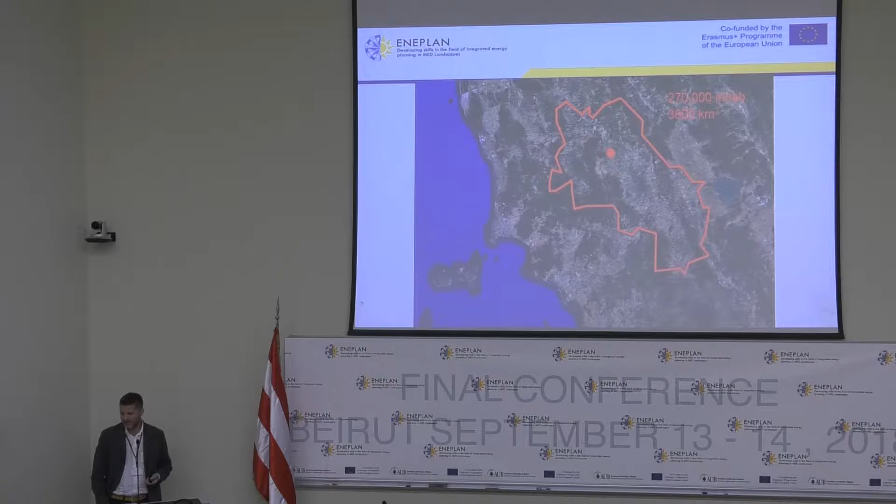The area of the province of Siena is mainly covered by agriculture and forests, so there are few cities—one of these is Siena—so it was quite easy to achieve carbon neutrality in this area. The point here is that Siena itself, the city, is not carbon neutral.

The urbanized area—especially the historic center of Siena, which is a UNESCO heritage site—we made an assessment of. You can do almost nothing within the city center, so we tried to provide a vision on how to make this historic center carbon neutral by 2050, for example, in the long run.

We first made an assessment of current emissions within the city center, based on heating and cooling systems in buildings, transportation, waste production, etc. We made a first scenario, a short-term scenario, in which we hypothesized actions to improve building envelopes and energy saving in buildings especially, and provision of electricity by photovoltaic panels.

We also hypothesized a long-term scenario with a full transition of the system to electricity fully provided by photovoltaic panels. To see if this scenario is feasible, we surveyed the available flat roofs on commercial and industrial buildings just around the city center.

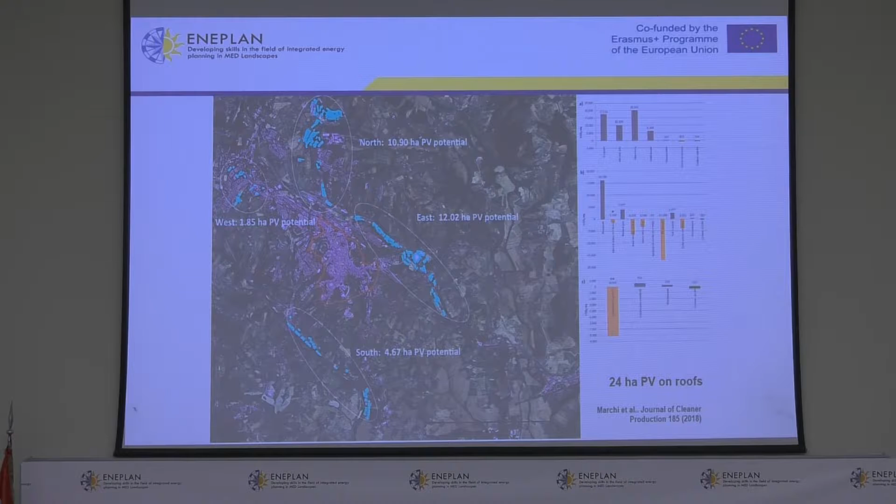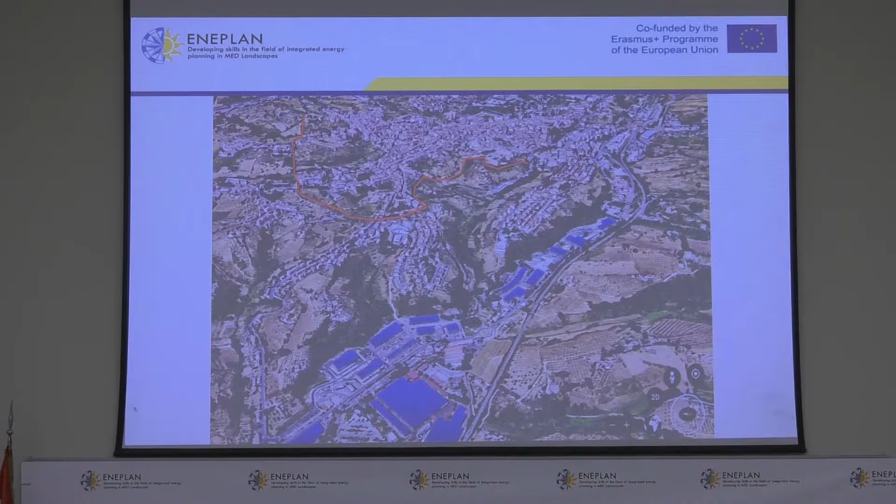This is an image of how it works: there is the historic center up the hill, and then there are the flat roofs of the commercial and industrial area here and here.

Third project: we are involved in a project named City-zen. It's an FP7 project funded by the European Union, of course, and we are part of a group of experts that travel throughout European cities to promote decarbonization through workshops or roadshows—kinds of living labs in which we work with local people, local authorities, and local stakeholders to promote actions towards decarbonization.

So the aim of the workshop is to figure out possible solutions, including renewable energy technologies and other integrated measures, to start this process, to kick off this decarbonization process of European cities.

My role in this case is to make an ex-ante evaluation of the possible effects of mitigating measures to achieve this goal of a carbon-free urban neighborhood.

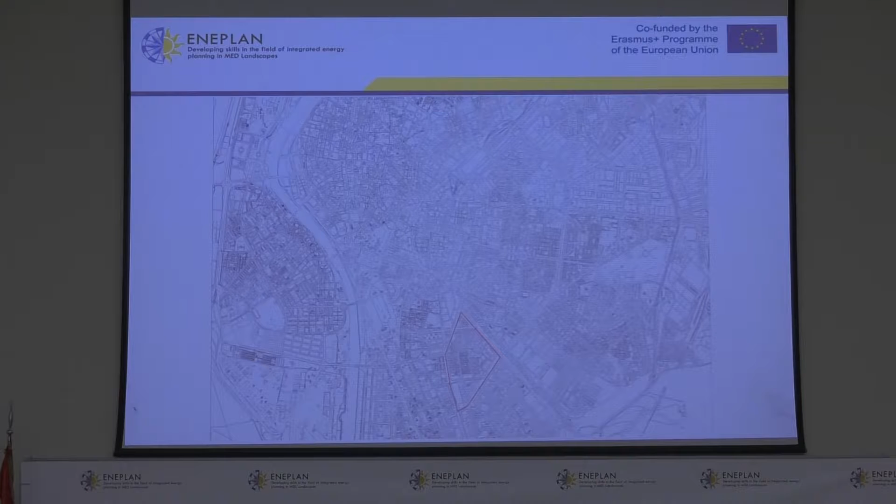We made an experiment in Sevilla, in a neighborhood called Tiro de Linea. It is a neighborhood of 14,000 people, and this is the neighborhood.

Usually the workshop takes place in one week. We arrive on Monday, we visit the place, then we have to figure out a plan, an energy plan, to design it, to assess the possible effects of this energy plan, and we make a presentation on Friday morning.

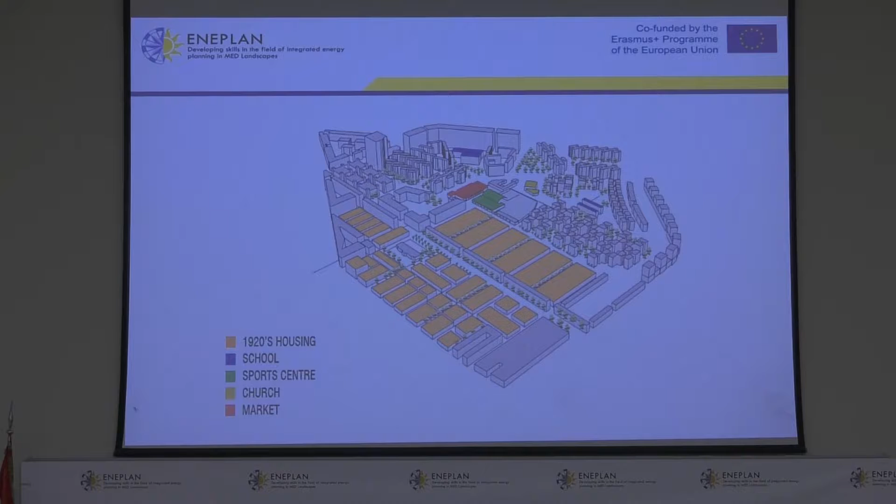Usually to make this assessment, I start from the single functional unit, that is the single household, the single family within this mostly residential neighborhood. In Sevilla, for example, the climate is Mediterranean, so it's quite similar to Italy, to Lebanon, and to our countries.

I've collected some data and information. We have seen that the electricity demand in houses is around 2 megawatt hours per year, and the heat demand is also very low in our countries, at 1.2 megawatt hours per year.

I also considered the use of private cars, waste production, and water use. Finally, I assessed the impact of one single household at 5 tons of equivalent carbon dioxide produced or emitted into the atmosphere in one year by every family.

Since I have to talk and interact with people during these workshops, what does this number mean? Well, it doesn't mean anything to everybody. It has no meaning, 5 tons. Is it low? Is it high? Is it very high? We have no idea.

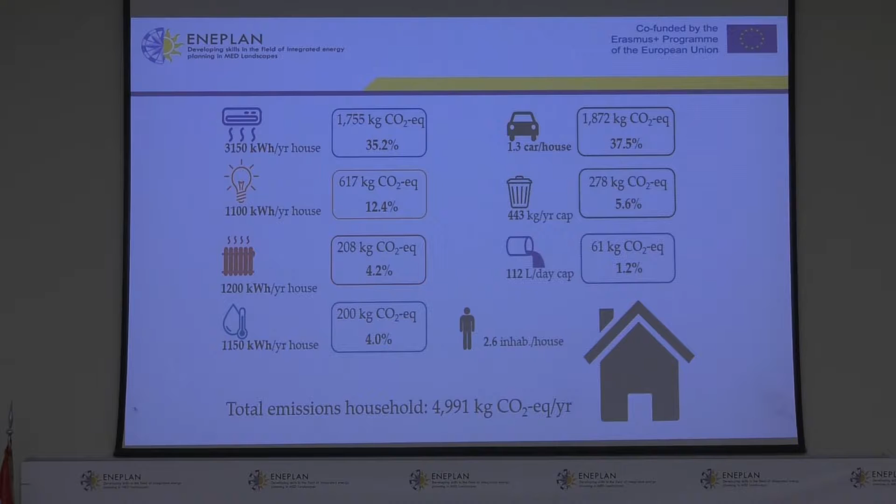But just to visualize it, we can say that in order to absorb 5 tons of carbon dioxide in one year, we would need a forest as big as a football field. So this is the forest we need per household in this neighborhood.

This is quite impressive, right? We would plan cities in which each neighborhood has a backyard covered by a forest as big as a football field. It's really impressive.

This is in general a common situation in most of Europe, so it's something that we need to manage. We made the same assessment at the level of the neighborhood.

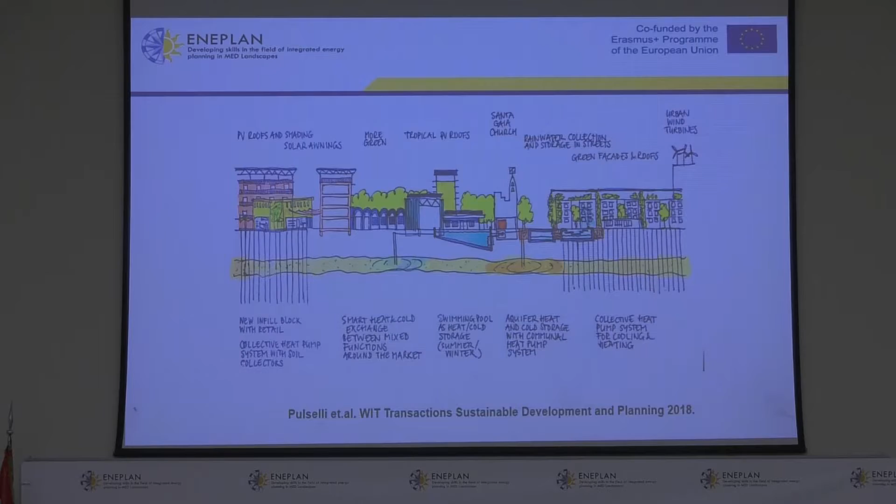With other experts from other European universities, we designed possible integrated solutions to decrease this impact and bring this carbon footprint to zero. What you see now is what is going to happen.

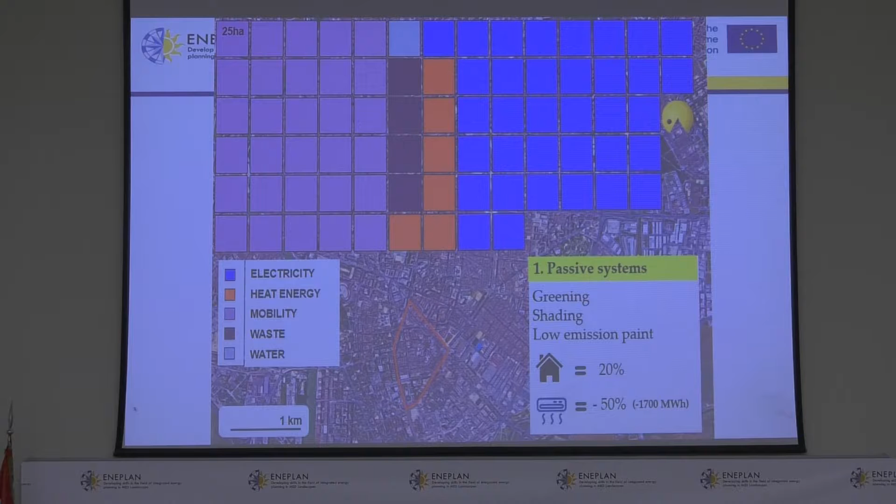Then we have thermal insulation of building envelopes, then energy saving by changing the lights, for example, or even decreasing the air conditioning, like in a place like this, where we all feel cold because it's too strong.

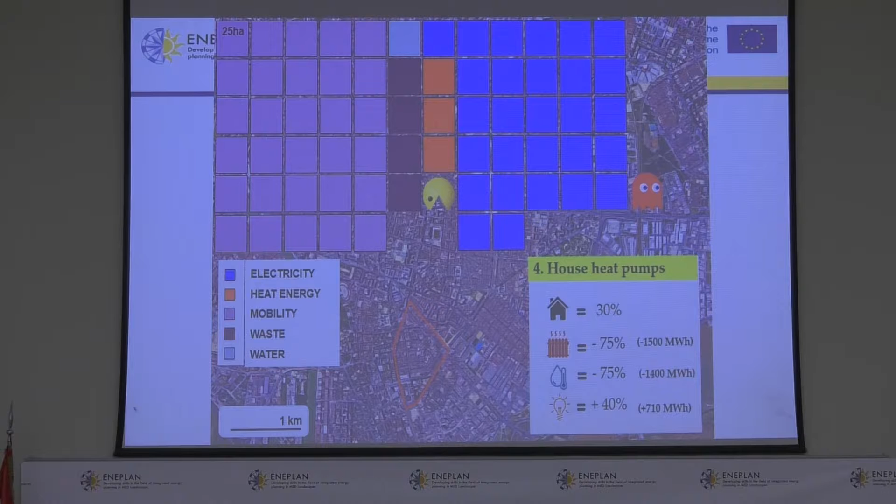Heat pumps for heating houses. When you see the ghost appear, it means there is a decrease in fuel demand for heating, but there is an increase in the demand for electricity. That's why the ghost appears.

Then, again, heat pumps at the neighborhood level, PV panels on houses, PV panels at the neighborhood level, and other solutions for sustainable mobility: bike sharing, bikes to school, electric tram lines, and a full transition to electric mobility that also requires increased electricity demand, so the ghost appears again.

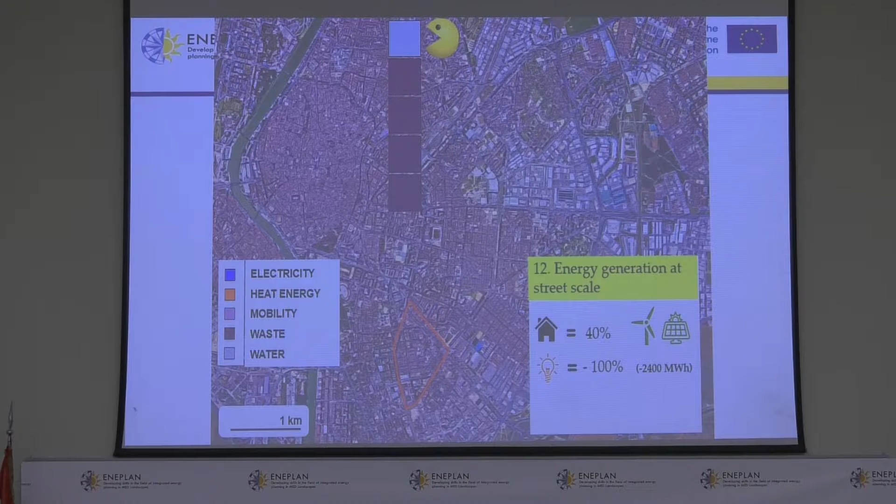And finally, other PV panels and energy generation at the street scale, better management of waste at the urban level, and the final carbon footprint can be compensated by urban forestry.

So when we deal with scenarios and action plans, we've seen before what the vision is at the national level. This is an example of the vision we should have, and how feasible it is if we start now to change our cities and our neighborhoods.

This is something we can figure out also here in Beirut and everywhere in the world. It's something that concerns our life, our neighborhoods, and our cities.

This is a concept map describing the process, but it's done. Thank you very much for your attention.

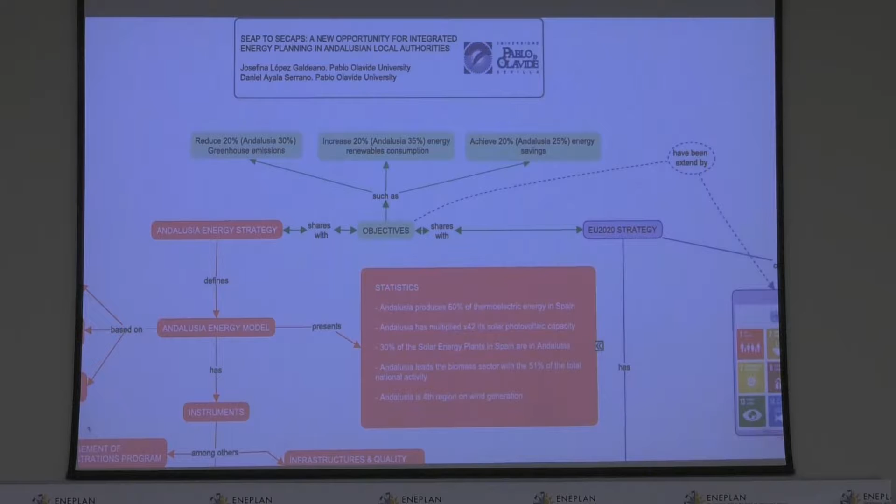So Daniel is going to explain a bit about the situation now, the impact of this policy, and the measures that have been implemented, and then I'm going to talk about the near future. Thank you, Josefina.

To understand the importance of the Sustainable Energy Action Plans, we need to start talking about the Andalusia energy strategy, because the strategy defines what the Andalusia energy model actually is. The Andalusia energy model is based on using local resources like biomass, wind power or solar energy, and also promoting renewable energy resources and accelerating the development of low carbon technologies.

For example, we have a success case study with Abengoa, a huge company that developed this. The actual statistics about the Andalusia energy model have been achieved because we have two previous plans: the Andalusia Energy Study 2000-2007 and the Andalusia Energy Study 2007-2013. The facts show that Andalusia actually produces 60% of the thermoelectric energy in Spain. Also, Andalusia is the fourth region in wind generation in Spain. We have put a lot of effort into renewable energy.

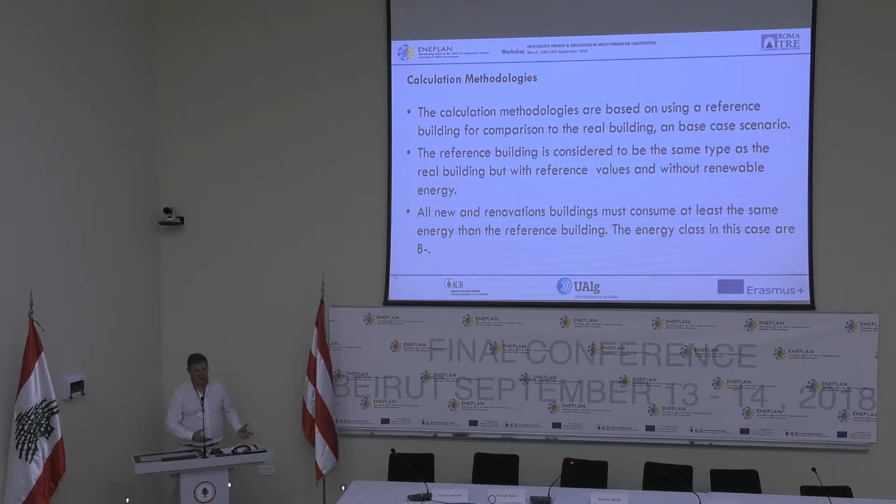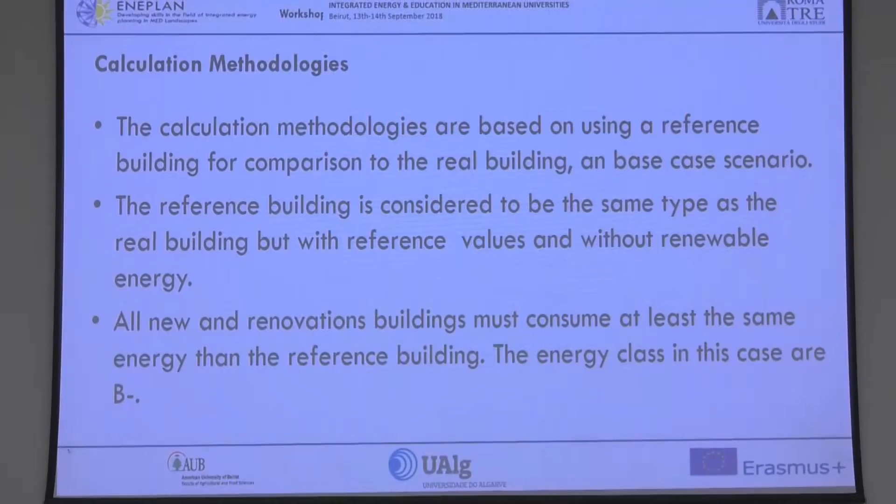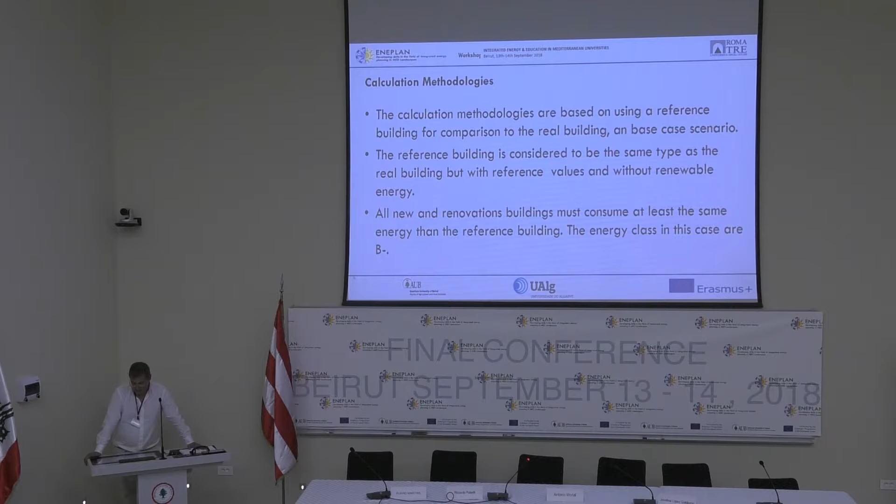The parameters can also change by year. For example, some parameters started in 2013, and in 2016 they increased. The reference building with these parameters is considered the same type as the real building, but using reference values and without renewable energy. All new and renovated buildings must consume at least the same energy as the reference building. The energy class in this case is B-.

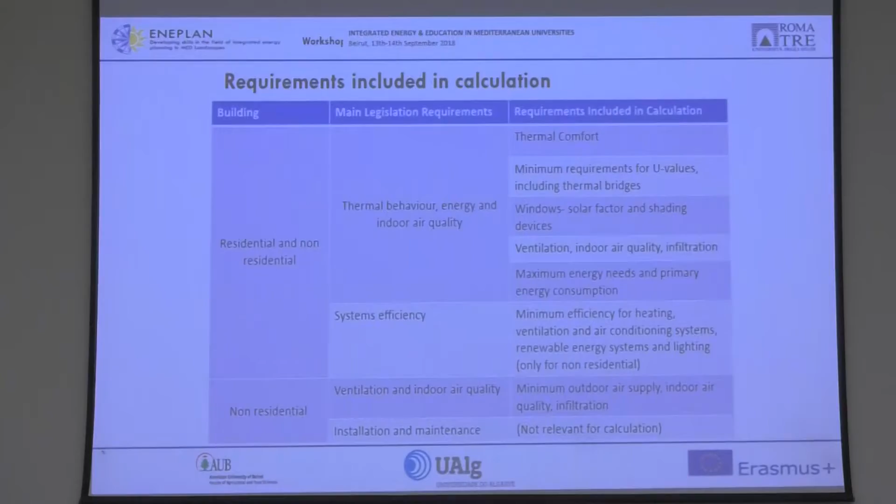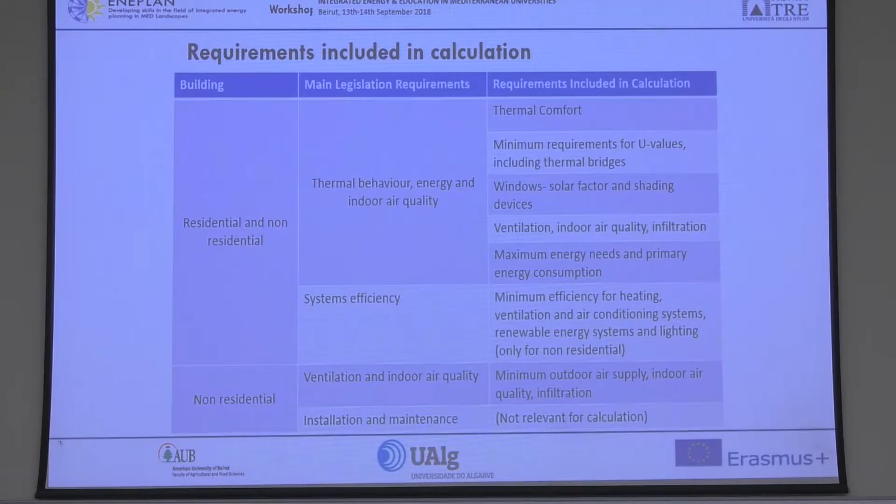They also have minimum requirements for overall heat transfer, including thermal bridges, columns, beams, and so on, a solar factor, ventilation, and also a maximum energy needs and primary energy consumption. We also have requirements for system efficiency.

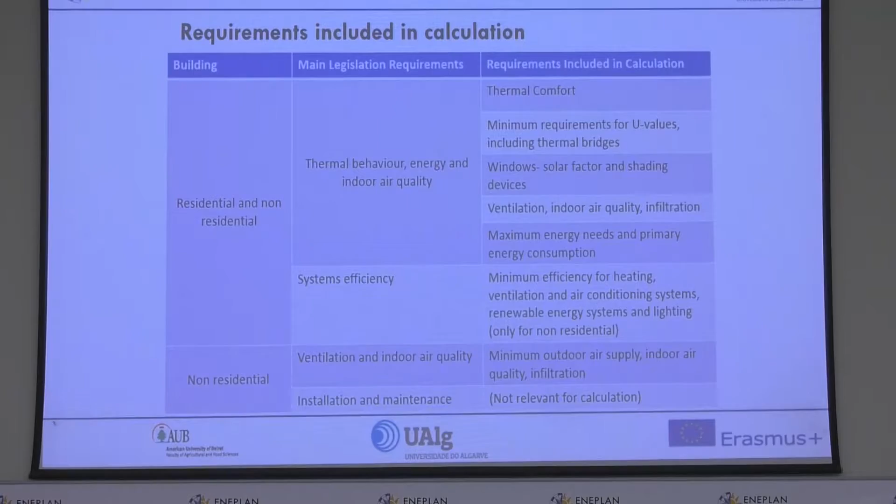This applies to the heating, ventilation, and HVAC systems. For example, to give you an idea, I1, I2, and I3 are the three climatic regions in Portugal, basically the south, the center, and the north.

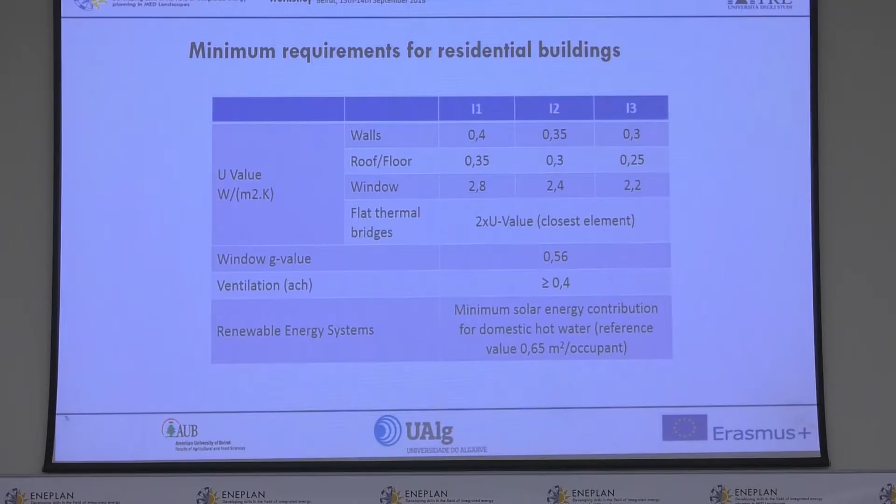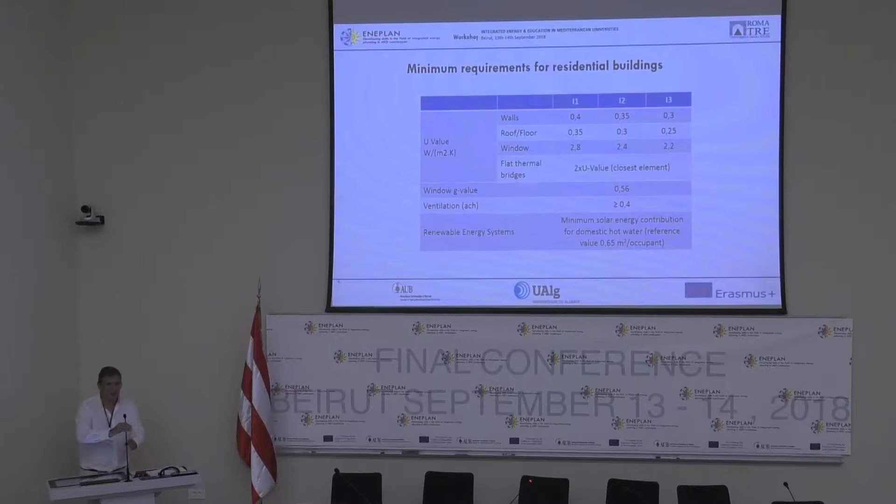For example, in Faro, for the walls, the minimum requirement is 0.4 watts per square meter per Kelvin. That means we need at least 6 centimeters of insulation, depending on the type of construction, but at least 6 centimeters. For the roof and floors, we need at least 10 centimeters of insulation. In the past we used to put in some air cameras to give an idea of that.

We also have the solar factor value for windows, so the sun doesn't heat the house too much in summer. We impose some ventilation requirements because houses need ventilation, and we impose renewable energy systems, with a minimum contribution of 0.65 square meters per occupant. This is compulsory for new houses.

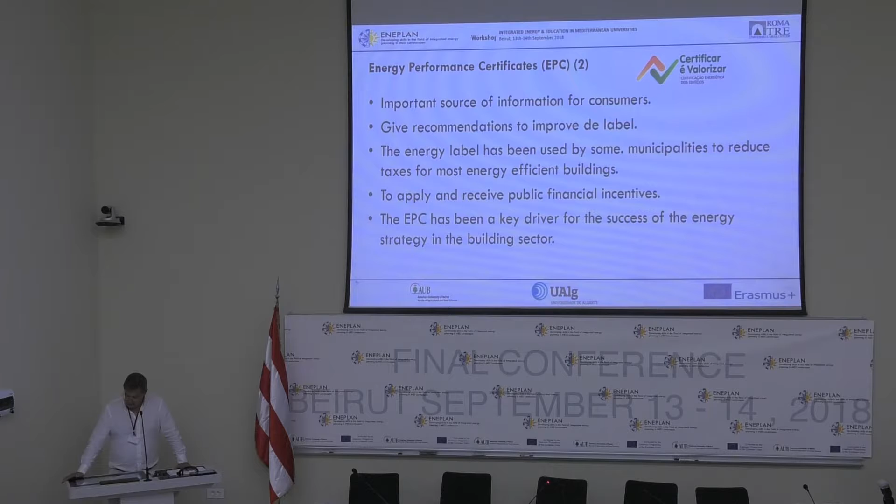The energy label is an important source of information for consumers. Give recommendations to improve the label. The energy label has been used by some municipalities to reduce taxes for most energy efficient buildings and also to apply and receive public financial incentives. The EPC has been a key driver for the success of the energy strategy in the building sector.

To do this calculation, we have 3 main members. The first is the heating. We look at the energy needs for heating and the systems, the energy needs for cooling, and the energy needs for domestic hot water. We do that for the real building and for the reference building.

Finally, I can show you an example of an EPC. An EPC usually has 8 to 10 pages that describe the walls, the ceiling, the ventilation, all the things I've said. This area relates to information about the building. This area is information about the label, and this area is about heating, cooling, and domestic hot water. For example, in this building, they have a label of A, and the heating is 77% more efficient.

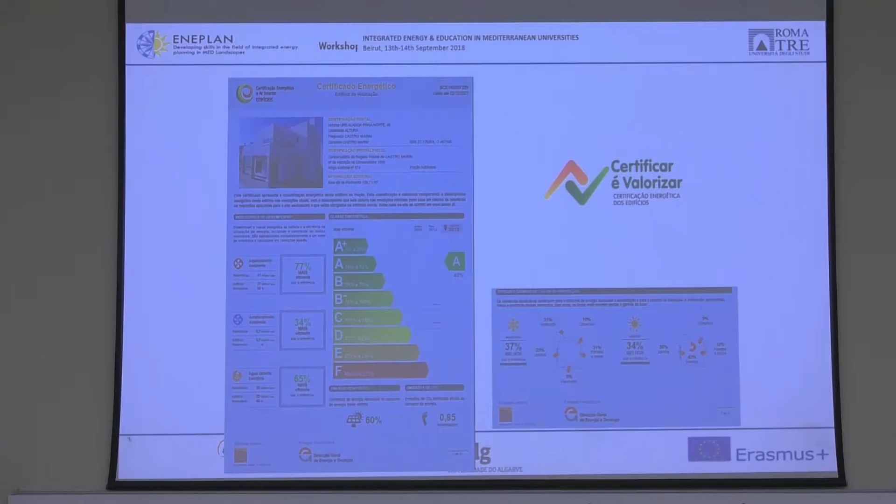77% more efficient than the reference building. It could be, for example, A+ for heating. Why? Because this building has a biomass boiler, which is considered renewable energy. The cooling is 34% more efficient - they don't have systems to cool, but they have nice windows and good shading. And for domestic hot water, they are 65% more efficient because they have solar collectors.

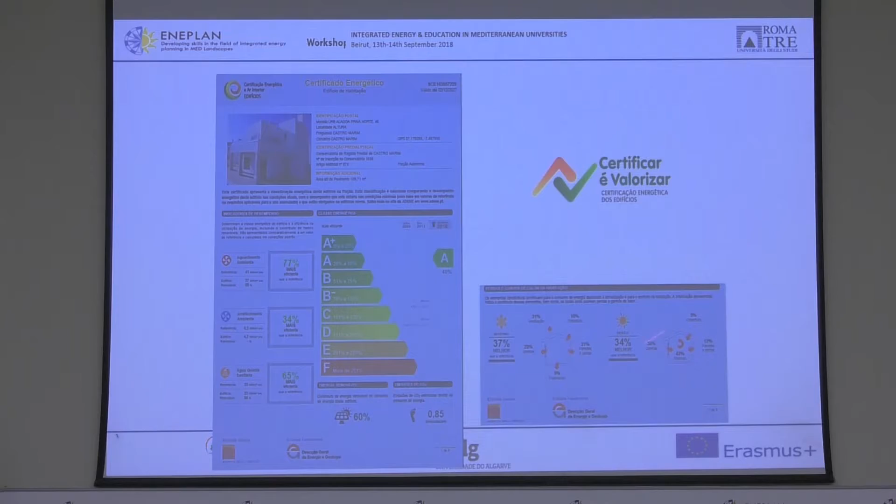This information is also interesting because it gives you the losses and gains of the building, where the building loses and gains energy. You lose, for example, 31% of the energy needs for heating through ventilation. 10% is about the ceiling, 31% about the walls, 5% about the basement and pavement, and 23% about the windows. This is for the heating needs.

The gains in the summer are basically through the ceiling, through the walls, and through the windows, and also internal gains due to illumination and the people inside. And thank you.